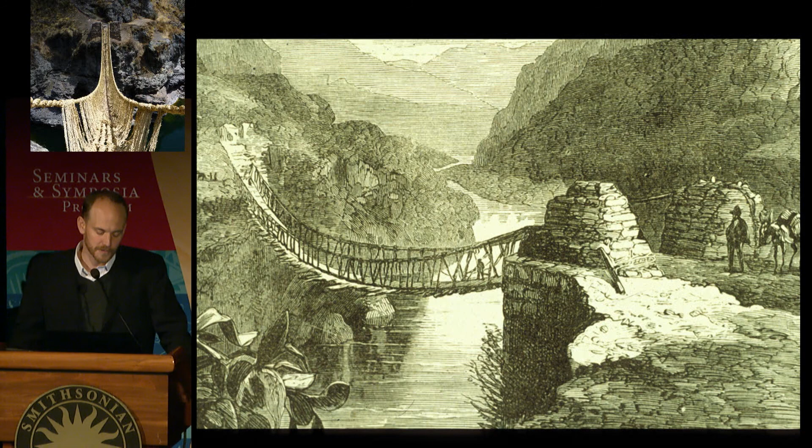And the fact that the tunnel through the rock was constructed meant that I think it's appropriate to use the term engineering because it was a premeditated act of construction in order to place the abutment in the most favorable location. And these bridges survived up until the late 19th century. And so I used to think I was born a century too late because chroniclers throughout the ages documented these bridges, and really their technology wasn't surpassed for centuries. They were so appropriate to the Andean context and frankly the very long spans with the difficult rivers beneath.

Looking down one of these bridges in the late 19th century, you can almost transport yourself back to the Inca period and envision how impressive these works are to us today and how impressive they must have been in the 15th century and in the height of the Inca Empire. Major bridges like this connected the main roads of the Inca road system leading to Cusco.

And these bridges played a really important and strategic role, not only in the growth of the empire and control of it, but also in moving goods and data, as we're going to hear next from my distinguished colleague Gary Urton. They also give us insight into construction and maintenance of public works in this period, and they give us a sense of really cutting-edge technology in bridge construction, and I'm going to try to make that argument to you.

So, on their strategic role, one of my favorite chapters in any book is this chapter from Book 3 of Garcilaso de la Vega, titled, "Many Tribes Are Reduced Voluntarily to Submission by the Fame of the Bridge." So if that doesn't convince you that these bridges were something special, and that the Inca was welcomed as a result of these because of the marvelous new work that seemed only possible for men come down from heaven. We could question how accurate Garcilaso is on some levels, but it's very clear from this that the bridges had an importance.

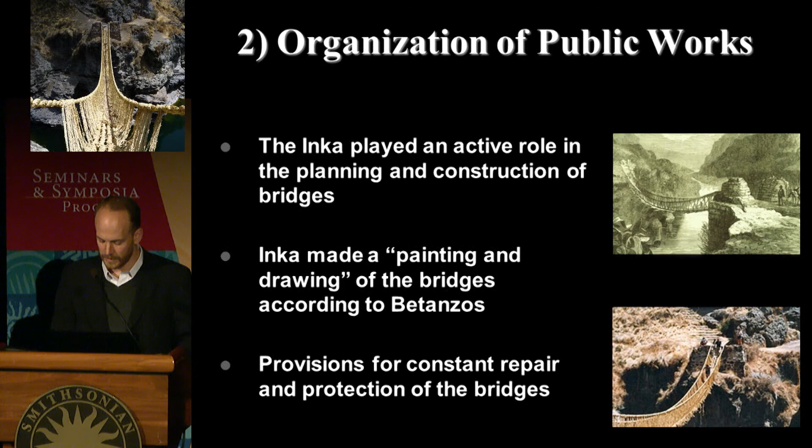They controlled who was allowed to cross, and we have some evidence that there were royal roads and royal bridges, and there were others that were used by commoners, and so there's more to be understood there. And one thing we've learned is that there were smaller bridges that were the responsibility of local communities.

The other thing I want to emphasize is that this technology was not only among the longest spans at the time anywhere in the world, but they're also very durable and long-lasting. They were not surpassed until really the Industrial Revolution in terms of an ability to span such long distances. And in particular, the whole concept of spanning a long distance in tension was really the opposite of a European method of bridge construction, which was most common, building arch bridges in stone.

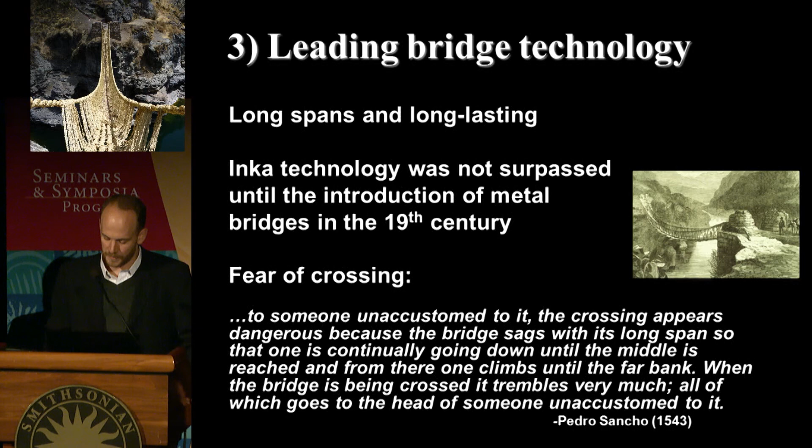We have evidence that some of the brave conquistadors crossed on their hands and knees. They called the bridges the work of the devil. And yet they also claim that the bridges were as solid as the streets of Sevilla. And we know that horses and cannons were able to cross these bridges. So these are substantial works of construction, but really fundamentally different worldview and in some ways emblematic of this clash of two worlds.

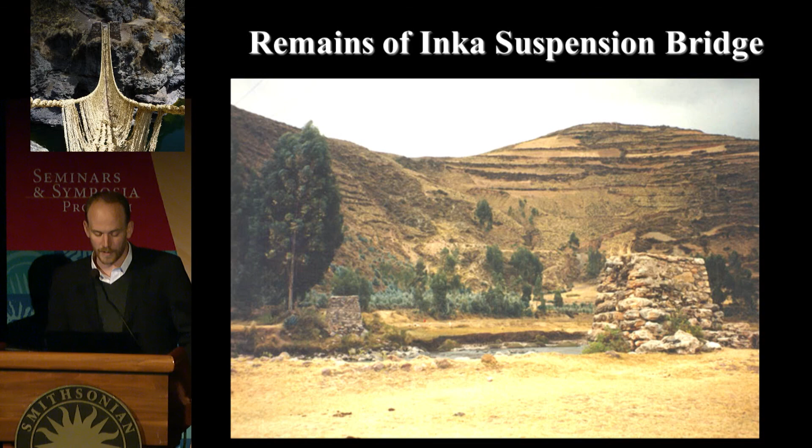Now, if you go throughout the Andean region today, you can find remains of Inca suspension bridges up and down the Sacred Valley, and there's ongoing research needed to document these remains because many of the bridges were in use up until even 100 years ago. You can find things like these two stone towers. The bridge crossing that Ken Wright taught me about and taught all of us about this morning may have had stone towers like this that could have been washed away over the centuries.

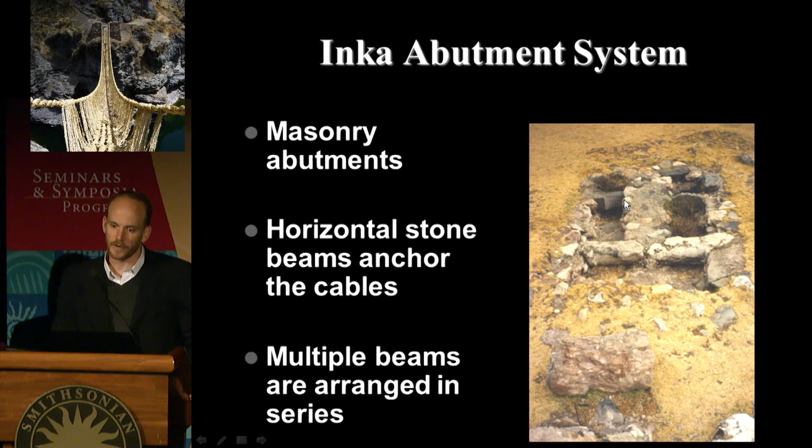And then abutments in the floor used horizontal stone beams to tie the cables off to, and multiple beams arranged in series. And what's very clever about this is that the masonry in the roadway serves as a level walking surface, but it also serves as a mass to resist the very large tension pull from the cables. So this is really an ingenious design, and these have not been well documented. In fact, you can see the stone in the top here, which is a stone lintel, but then it's carved and rounded and smoothed in order to receive the cable. So we need more documentation of these sites before they're lost.

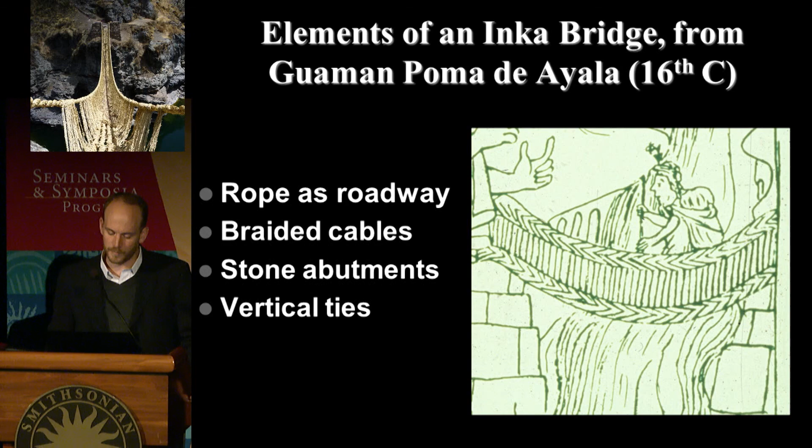And almost incredibly, surviving today in a rather remote region of the Andes, one of these bridges has been there since the Inca period. This bridge near a community today of Huinchiri in Peru has been there for at least 500 years, and most remarkably, perhaps, the bridge is built entirely out of grass that you see growing on the hillsides.

And you ask how you make a grass bridge survive for 500 years. I've had many students at MIT over the years come up with various answers. You dip it in carbon fiber solution with some kind of epoxy resin. But the short answer is that the grass is integrated within the communities on either side, and every single year in a 3-day festival, the bridge is rebuilt entirely.

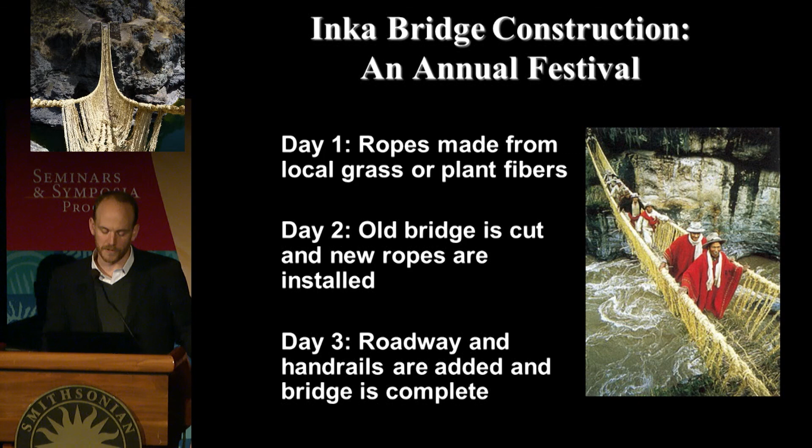So not only do we have the bridge as an artifact from the Inca period, but we also have the process of construction. And on the first day, each household produces about 50 meters or 150 feet of cord to make ropes. The second day, the old bridge is cut, new ropes are installed, and on the third day, the bridge keeper installs the handrails and completes the bridge. So I'll just take you briefly through the festival.

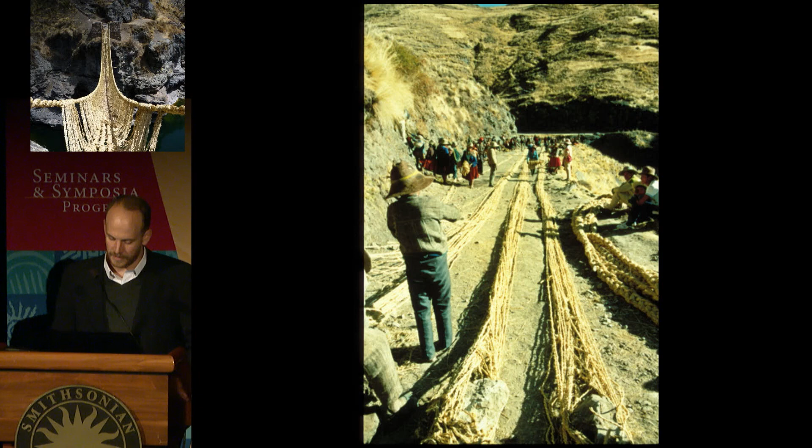Collecting the grass, which is a type of ichu grass that grows and is commonly used throughout Peru. You can see a small cord about the size of your index finger emerging from the twisting. Those are laid out in bundles of 24 cords, and about 700 community members come together to build this. And over 2 days, those cords are twisted and then braided in a traditional rope walk.

So you can see the ropes being passed as the braid is being done. And then the cable that emerges is about the thickness of your thigh, and that's the main structural element for the bridge, which is then passed across with a small traveler rope to the stone abutments. And even though they've been rebuilt and repaired over time, we believe they date, and the crossing dates from the

Inca period. And here you see the main structure of the bridge with 4 cables for the floor, which are then tied off to a stone abutment. The scale is a little misleading. This abutment's quite large because those cables look small in this image, and are then tied off to these stone blocks embedded within the masonry walkway.

At the end of day 2, in case you're tempted to cross, there's a banner put across that says it's not quite ready. And most of day 2 is spent pulling on the cables, taking slack out of the bridge, and so you can see that it's almost horizontal. It can't go quite all the way horizontal.

And then on the last day, it comes down to the work of the ChakaCamayoc, or bridge keeper, who today is a man named Victoriano, whose family has been responsible for this phase of the construction for more than 300 years. So he's a direct descendant of a long, long tradition of master bridge builders, and his job is not easy over the rushing river, braiding these cables together.

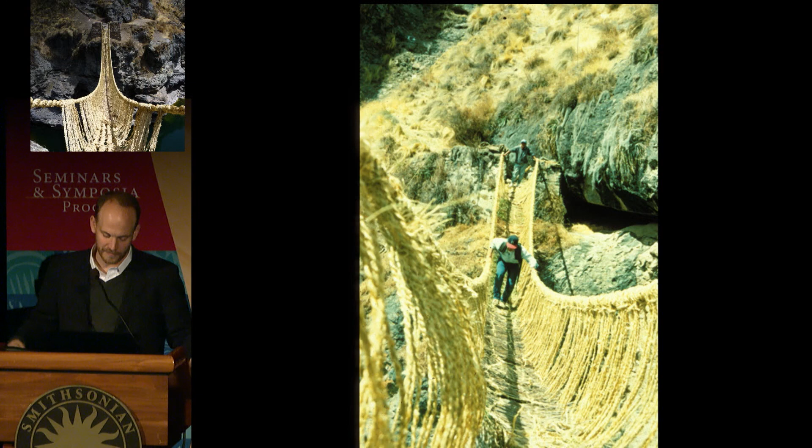And he, like the Spanish, was rather terrified, and he said, I'm afraid if I lean out on the cables, maybe it'll just move out into space, and if I grab the other one, the bridge will flip over and dump me into the canyon. He said, does that ever happen? And one of the community members said, oh yeah, that happens all the time. Which of course is not the case.

And I'm absolutely thrilled. This is Victoriano, that a new documentary film, The Last Bridge Master, is documenting his family and their struggles to pass on this tradition in the face of a lot of other pressures in the period that we live in today. And I'm particularly excited about having him explain in his native Quechua what this bridge means to him and his family and his communities. So this is really an incredible piece of Inca engineering that we are fortunate has survived until the present day.

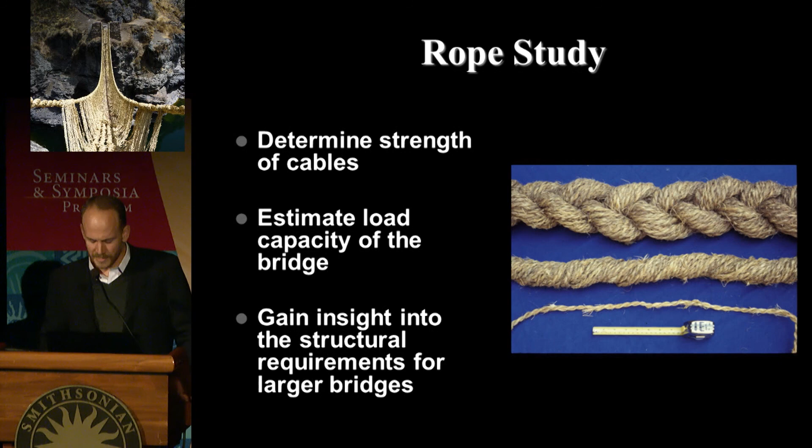As an undergraduate, I was lucky enough to tackle this project as a senior thesis, which involved a typical engineer's question: how strong were the ropes? So I did load testing on these ropes and found that a single main cable could support about 4,000 pounds in tension before failing. So that's about strong enough to lift up 2 small cars.

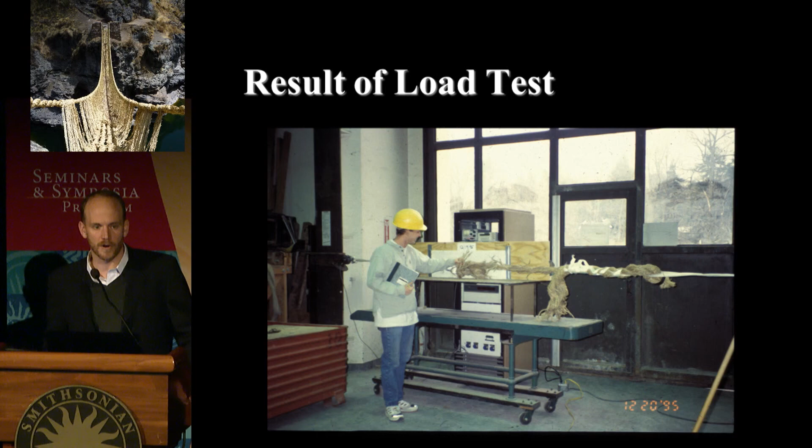And then I said to my advisor, nobody's ever measured the bridge. I really need to go to Peru. And she was terrific and said, yes, you do. And I got to go to Peru and measure this bridge, and I found that the span is 99.5 feet, which we'll call 100 feet, and did an analysis that showed what, of course, the community knows, that the bridge has plenty of load capacity. This is about as many people as I've ever seen on it.

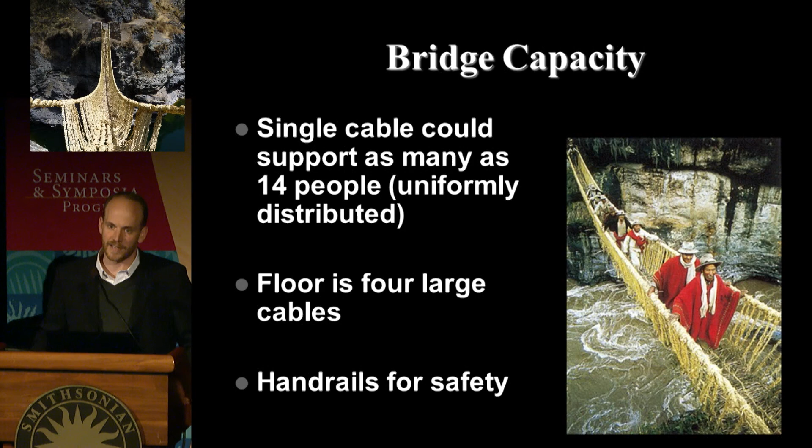And in fact, historically, there's a certain amount of engineering that's gone on to get the right number of cables for the needs. Then a few years later, with colleagues Linn Hobbs, Heather Lechtman, and Dorothy Hosler at MIT, they taught a class on materials and Andean society, and we had students make cables using natural fibers. They braided them, and then we built a replica bridge on the MIT campus over this raging river.

And we replicated the same way of getting the first traveler rope across and then pulling the cables across, stretching them between abutments. And the students really enjoyed this, you could imagine. We called the project ChakaCamayoc for the building next door. And our students are somewhat sleep deprived. And this was a really terrific exercise for all of us, and I got a lot of publicity at MIT for this. It was a great experience for the students and the faculty.

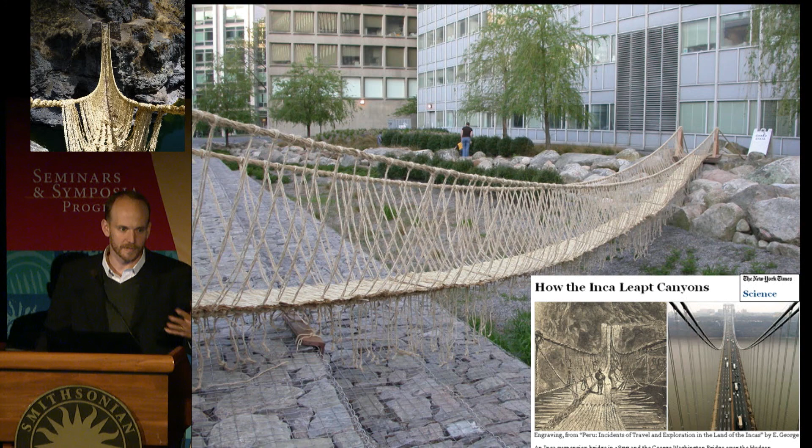And when the New York Times wrote an article about how the Inca leapt canyons, highlighting this bridge and our reconstruction, for 3 days on the New York Times website, this was the #1 most emailed article, which tells us that the public also has a fascination with these bridges and with the act of reconstructing this particular bridge.

So this bridge has survived, even though a truss bridge from the 1960s was built adjacent to it. Work, play, religion, and technology aren't separate activities in the Andes. And that truss bridge, which was really imported, not integrated into the communities, is now corroding and falling into the canyon, where the original grass bridge for the last few decades hasn't been necessary to get across the river, but the festival must go on and the bridge is produced anyway. So we're very fortunate for that.

So just in closing, thinking about what can bridges teach us, working on an exhibition here on the Inca road system, I would argue that there are lessons we can learn about their technology, about their social integration within the communities, and also about their environmental performance. The scale of the spans that they achieved not only evoked wonder at the time, but even more so today, the strength of fibers in tension.

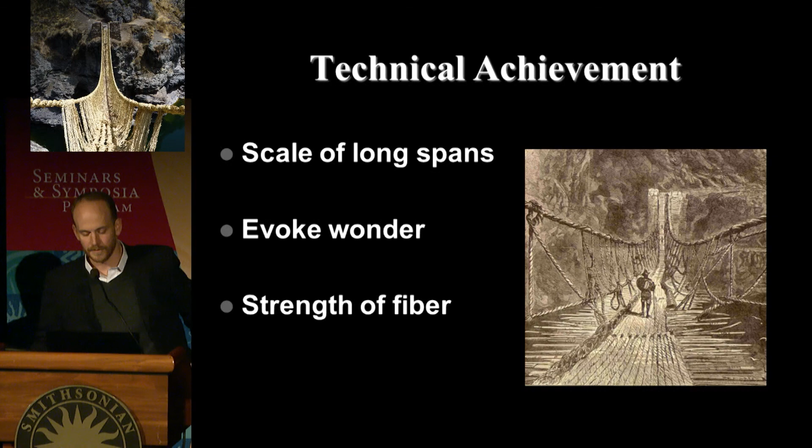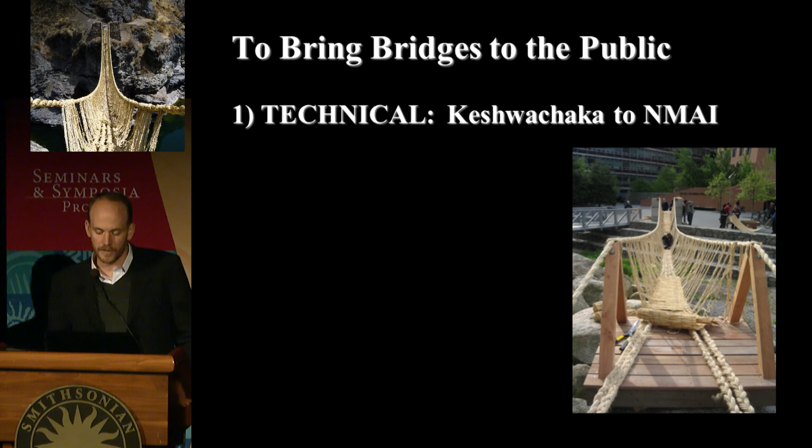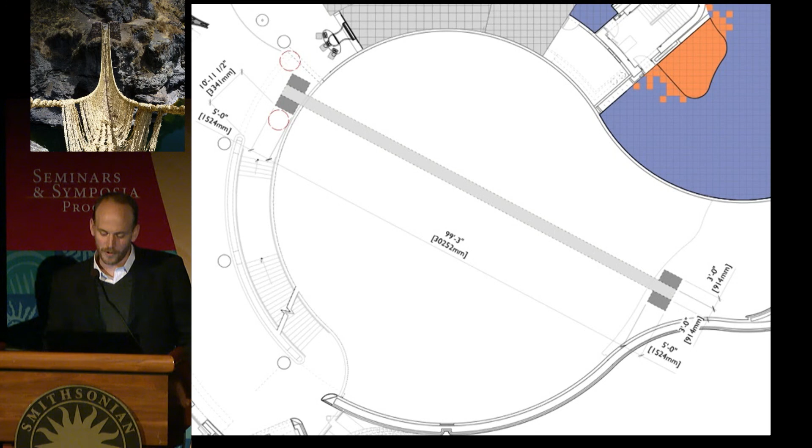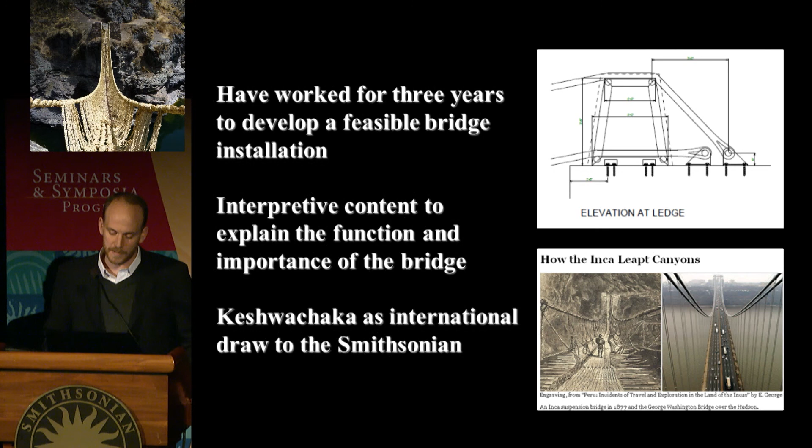And one of our possible ideas for the exhibition is to mount a replica of this bridge here at the National Museum across the rotunda between 2 openings, which when we went and measured them recently, we learned that the span was 99 feet 3 inches. And so we've been looking into the feasibility of that, have worked together on developing techniques to connect it to the existing building, and the concept is to have Victoriano produce a bridge, possibly as part of the Folklife Festival on the Mall in Washington, or possibly in Peru, and then ship it here to be installed. But we want to introduce the authentic bridge made by the community. And we really think that would draw people not only to this museum, but to the Smithsonian at large.

We also want to work to document the festival, something that's really been lacking in the past, and these remarkable filmmakers who are working on this social sustainability side of the project and documenting the builders speaking in their native language about the process and technology of the construction. And we think that's tremendously important as well, not only to understand how this bridge has survived until today, but how it can survive for future generations, and to continue thinking about the way that the Andean worldview treats large-scale works of engineering like this, which I believe in some ways is fundamentally different from the way we think about large-scale works of engineering, and has things to teach us.

The fact that the infrastructure is integrated within the community, and that everyone is involved in the upkeep in this way. And then also thinking about appropriate technology for the Andean context. And when we think about building for generations, this bridge is truly sustainable from an environmental standpoint. It's 100% biodegradable. It washes away in the river every year, and it regrows every year. The primary fuel for building it is the chicha, the corn beer, which is also grown sustainably.

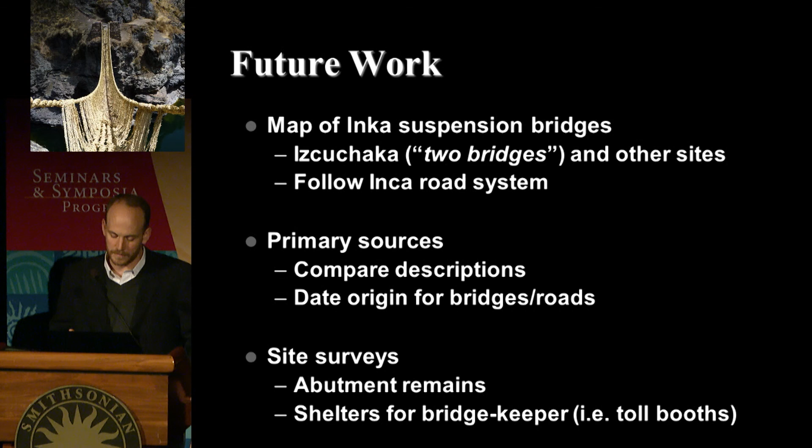And then surveying and documenting the abutment remains, which in the cultural landscape of the Andes Mountains, the abutments haven't ranked high on anybody's list. And yet, I think they're really important for us to understand the history of this technology and the history of the road system, and also shelters for bridge keepers.

And I want to end by thanking Ed Franquemont, who was known as Inca Ed, who was studying anthropology at Harvard and studying Andean society. And he realized if he really wanted to understand the Andes and learn how to weave and to think in an Inca way, that he needed to go and live there. And he lived for 20 years in Peru and spoke Quechua. And I'm very grateful that he introduced me to this topic, and there's still so many things that we have to learn. And I'm absolutely delighted that the Smithsonian and that the National Museum of the American Indian is helping to create new scholarship and to bring this important message to potentially millions of people around the world.